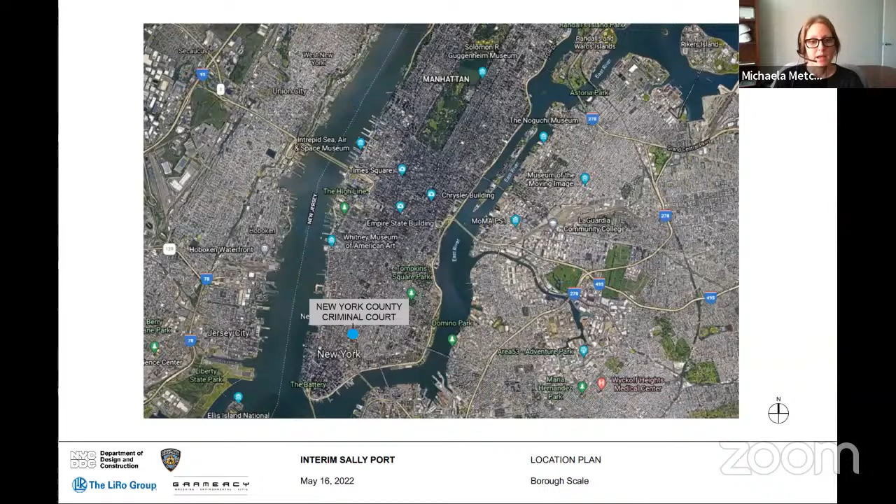The New York County Criminal Courthouse is located in Lower Manhattan. The courthouse is within the Civic Center area and is located on Centre Street between Hogan Place and White Street. This is a view looking north from the corner of Centre Street and Hogan Place. The courthouse is immediately south of the Manhattan Detention Complex to be dismantled.

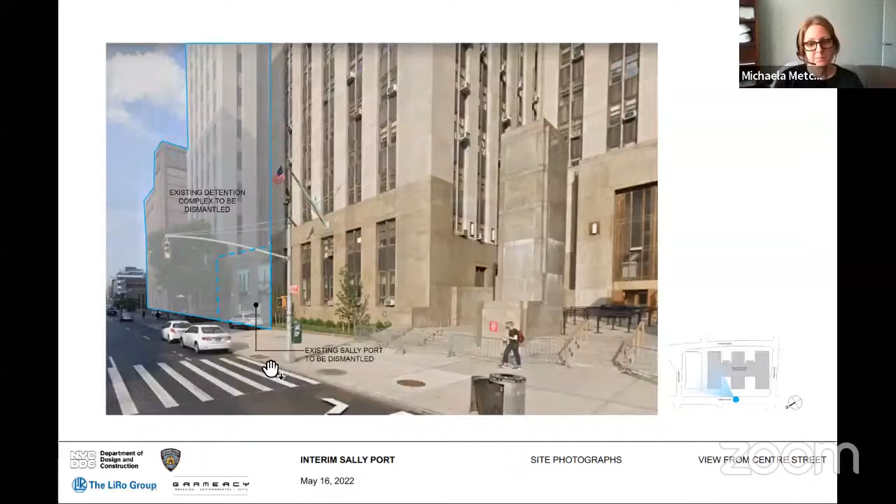This is a view of the existing Sally Port sidewalk and curb cut, which have been used by DOC since 1940. A Sally Port is a secured, controlled entryway into a secure facility. The Sally Port allows DOC and NYPD to safely transport people in custody to and from their court dates and must be operated 24 hours a day, 7 days a week.

This site diagram shows the location of the existing sally port between the detention facility and the courthouse and its relationship to the two buildings. The existing sally port is located directly on top of the cellar and subcellar levels of the detention facility. These cellar levels extend more than 15 feet below grade and will be dismantled along with the upper levels of the detention facility.

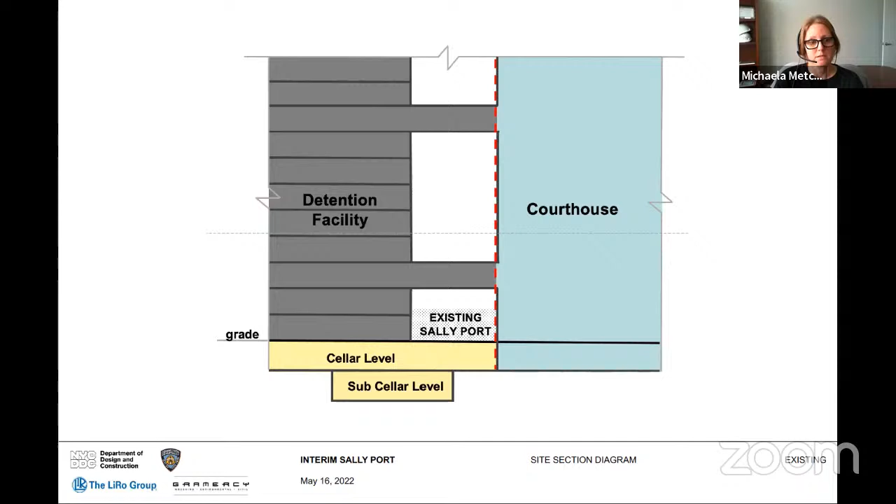DDC has determined that keeping the existing sally port operational during the dismantle work is a safety issue that is not negotiable. The existing sally port is within the dismantle zone of influence for the MDC South Tower and directly below the bridges connecting the MDC South Tower to the courthouse at the 3rd and 13th floors, both of which are being dismantled.

There will be scaffolding on the south facade of the MDC South Tower around and under the two bridges immediately above the existing sally port. You can see this is the area of the existing sally port in here.

Further, the area will be utilized to move materials off-site. Dismantle operations of this scale with high-rise towers plus two bridges on a tight site is extremely challenging and requires scaffolding and barriers to protect all who work on and around the site, as well as protect the adjacent structures.

Moving the sally port away from the dismantle work area, as recommended by the dismantle engineer, is the safest approach, while ensuring that critical DOC and NYPD operations can continue uninterrupted and persons in custody can make their court appearance without undue delay. The placement of the interim sally port on Centre Street allows people in custody and staff to safely move into the courthouse in the most direct route.

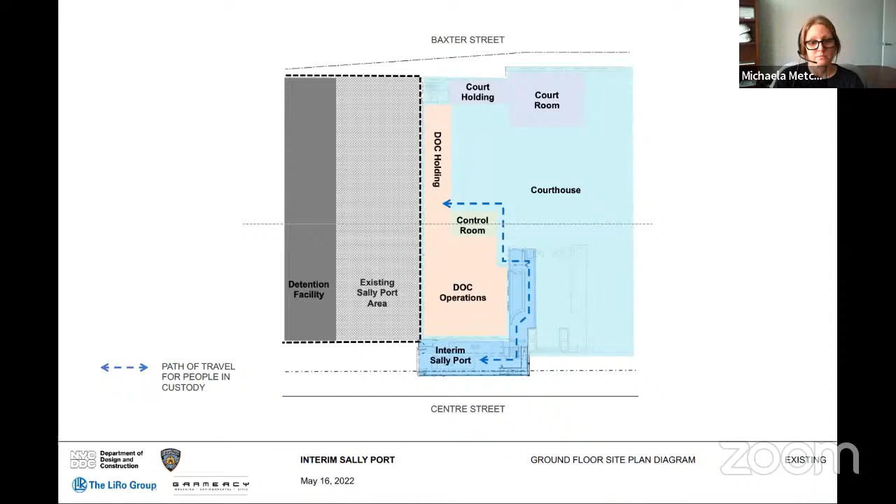Next, I will address the artwork on the west facade of the interim sally port and how this application will be coordinated with the structure's windows.

The windows will include gray tinted glazing, and the artwork will be printed on aluminum decals that will be applied to the metal panels.

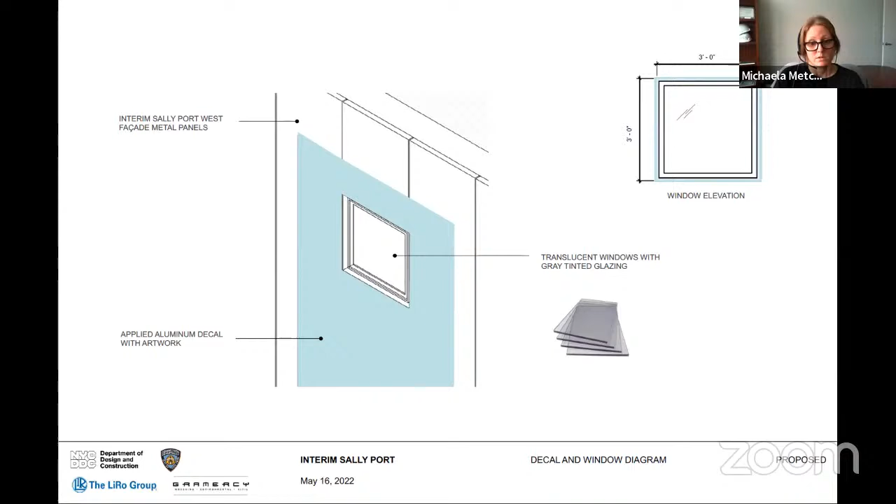Once the decals have been fully adhered to the metal panel substrate, the installer will carefully and neatly cut out the window openings so that they are aligned with the window, so that the openings of the artwork are aligned with the window beyond.

The translucent windows and aluminum decal for artwork have been added to the materials for the project.

Next, Lauren Messier, a member of our BBJ communications team from our project management consultant, AECOM Hill Joint Venture, will provide an overview of community engagement for the project.

Morning, everyone. I'm Lauren Messier, Outreach Manager for the New York City Borough-based Jails Program. I'm going to provide an overview of community engagement activities for the Manhattan project.

These presentations have covered various aspects of the project, including the design and placement of the interim sally port, the removal of existing artworks from the MDC site, and upcoming site work, mitigation measures, and any potential impacts on the community.

In the time since the interim sally port proposal was presented to the Commission at last month's meeting, we have returned to Manhattan Community Board 1's Land Use Committee for a third time to present the updated sally port design per PDC's request. We also requested any design feedback in writing via email.

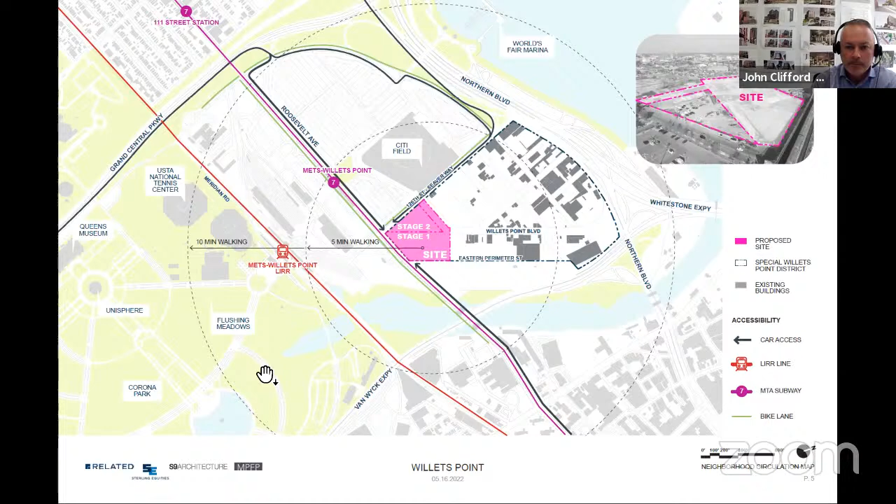So the site is located in the Willets Point Special District in the north part of Queens along the Flushing River. We are stage 1A in the bottom left-hand corner of the Willets Point Special District, so it's fully accessible to both the Number 7 train and the Long Island Railroad stop there. The site right now has gone through remediation from its former use, which was a bunch of scrap yards and car repair yards.

John, can I just interrupt for 1 second? Sure. Just to highlight in the previous image, if you can go back one - in the past 9-10 months since last summer, our team, acting as the developer but in coordination with our partners at the city, has remediated this whole site. We removed 93,000 tons of contaminated soil from the site in the past 10 months. We're going through the final stages of the last bit of paperwork with the state. This cleanup, the brownfield cleanup program, was done in conjunction with oversight from New York State DEC.

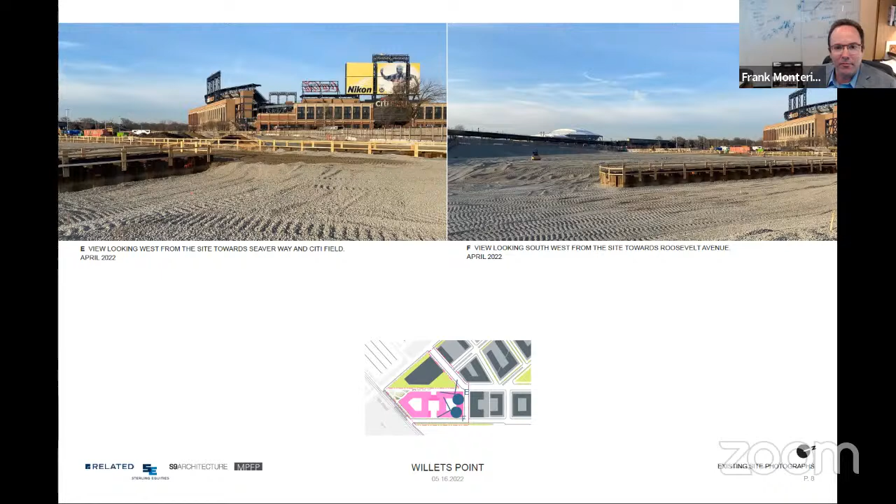Having grown up in and around this site, I can tell you it looks a lot different now than it did a year ago.

The site we found was one of the most unique sites we've ever worked on, certainly in New York City, in that it's a very large piece of land, fully accessible by highways and public transportation, but never really developed. It's probably most famous as being the ash heaps in The Great Gatsby, when it was cinder ashes filling in the Flushing River marshes. And then the 2 World's Fairs that Robert Moses mounted kind of surrounded this, but it stayed undeveloped.

Around 1940, it started its evolution as what was known as the Iron Triangle, which were car repair shops, chop shops, and scrap yards. There was a ULURP master plan for the entire Willets Point district taken on by the City of New York, by the Department of City Planning, and the start of private development, the cleanup, began around 2018, and now we're at the start of the phase 1 development.

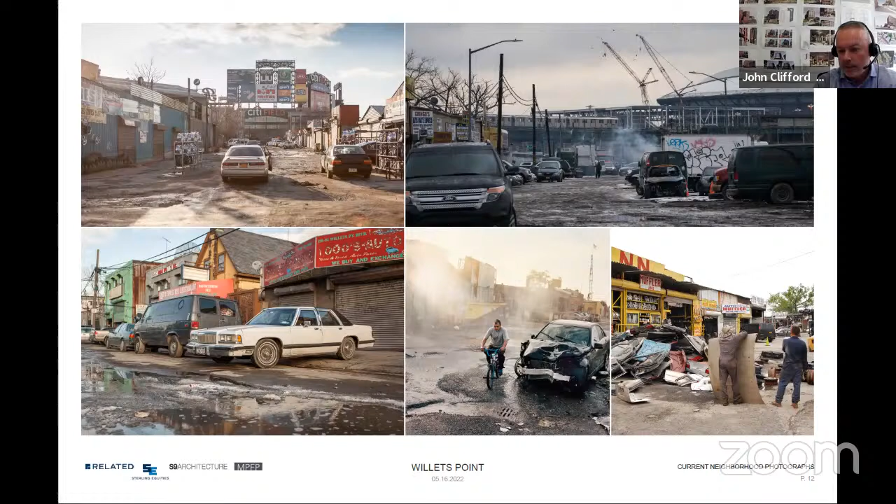The site is entirely in the flood zone. The entire Willets Point district is going to be raised up above the flood zone, so this will be a fully resilient neighborhood.

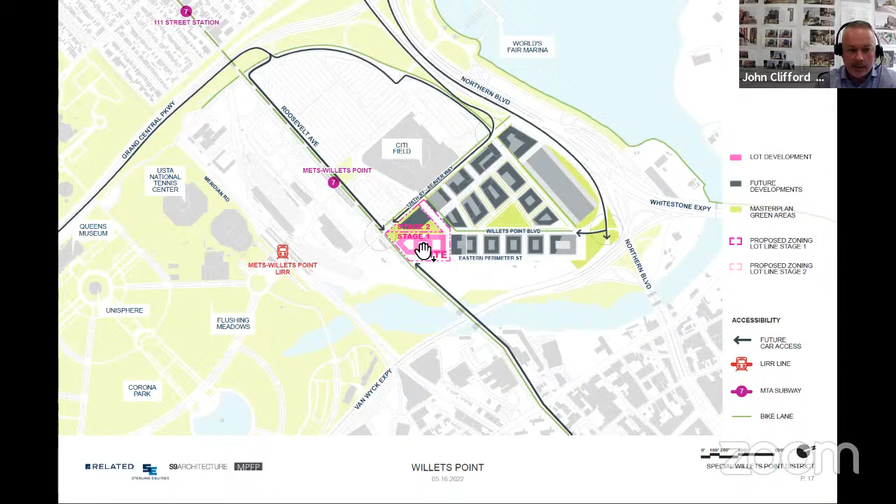Now we're in the special district. This is the corner, so you can see our site at the bottom left-hand corner there, the 3 buildings highlighted in pink, and their massing. So it's 3 buildings - it looks like 2 here, but we'll go through where the 0 lot line is.

12 stories tall with 1,100 affordable residential units. And then also in that pink area is the public realm that will be constructed as part of this first phase. You've already reviewed that conceptual design with Rick Parisi about 6 months ago.

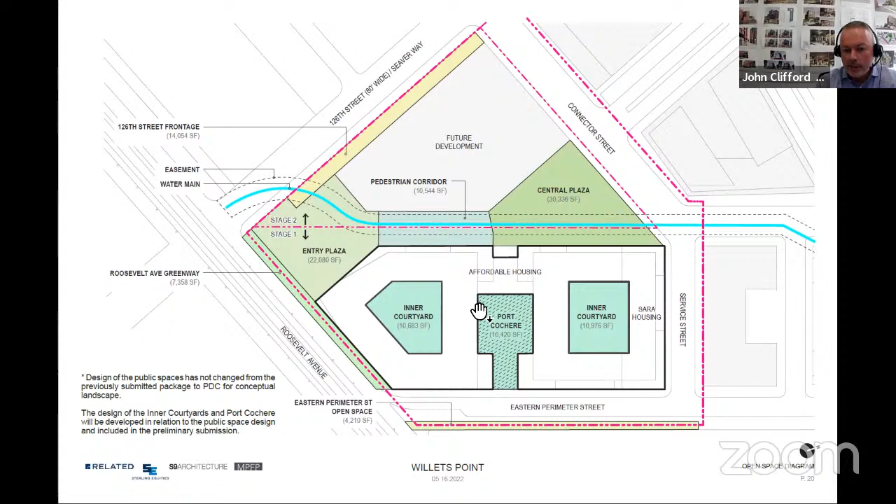So now for the design concept for the buildings themselves. One of the things about this is Willets Point has historically been totally underdeveloped and kind of isolated by the highway system around it. It's probably one of the most visible but least developed pieces of real estate in New York City.

In looking at this, the first building will act as the precedent for all the future development within the new neighborhood. So we really wanted to emphasize technology and design that was both sustainable and resilient, really create a new community - not look at this as buildings, but the beginning of a new neighborhood - and reimagine how affordable design can transform and build this neighborhood, especially with the affordable homes for people, in a much more rapid way.

In the concept phase, which is where we are now, we're looking at different types of technology for both sustainable and resilient design. We're looking at green roofs, potentially some community gardens on the roof, solar and photovoltaic uses, geothermal heating and cooling as a potential way to power this neighborhood. So we're in the concept phase for that.

What we really wanted to do is think about this as creating a community. It's isolated by its physical barriers, but still draws on Queens itself, which is probably the richest tapestry of neighborhoods in the United States, and how we can create a new neighborhood for Queens that's just as iconic as Corona, Flushing, Forest Hills, Jackson Heights and others.

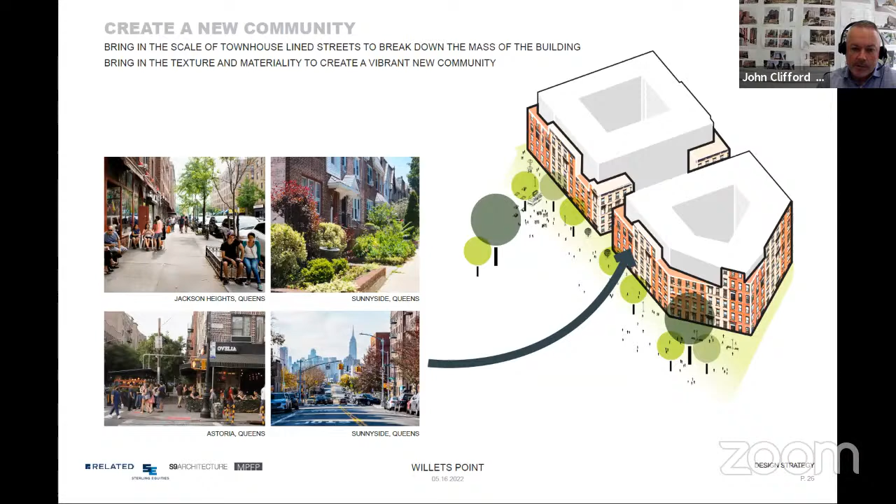Then thinking about how to really celebrate this approach at the public realm, and the number 7 train that creates this movement going east and west past that public plaza and entry park. So having a more organic expression that spills onto that facade and relates to both the public realm, public plaza, as well as the number 7 train's movement going east and west.

We also want to, as part of building this community, celebrate its art and celebrate the diversity of the community. So we're looking at how that can be incorporated into potentially the courtyards or the lobbies or some of the more public areas of the buildings themselves, and potentially going back and looking at how it can go into the public realm of the plaza and the pedestrian way on Willets Point Boulevard.

So what we came up with was a way to effectively create a kind of dynamic movement along the facade that creates this organic spill I talked about, where there's a gradation in the primarily masonry wall facade, transitioning it more toward a metal wall facade by diminishing the brick widths as we go across the bays here.

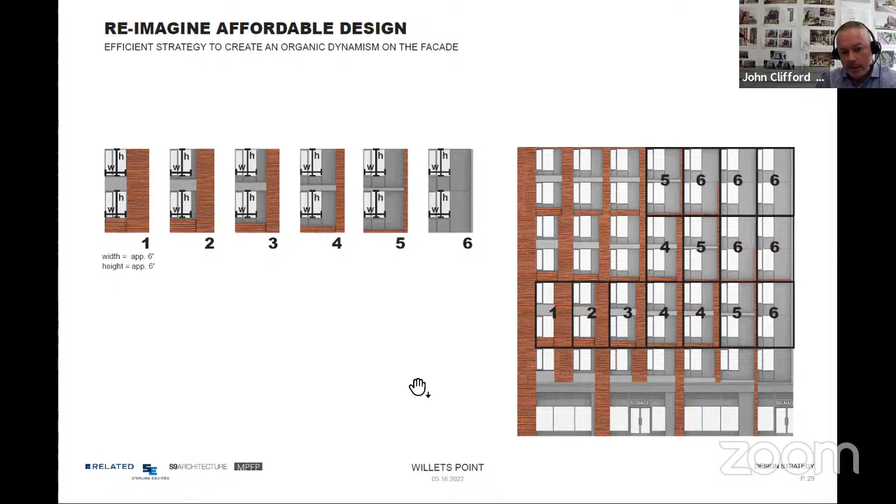So this is more of a technical drawing of how this is accomplished, and then you'll see in the rendering how this affects the facade.

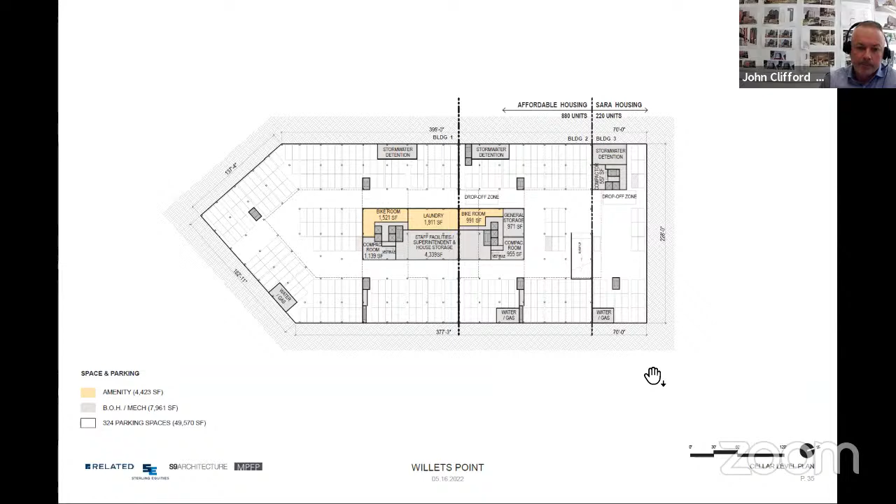On the roof, we're planning an amenity area for the affordable housing residents, and that might have access to some of the community gardens and other things that we talked about earlier that we're investigating.

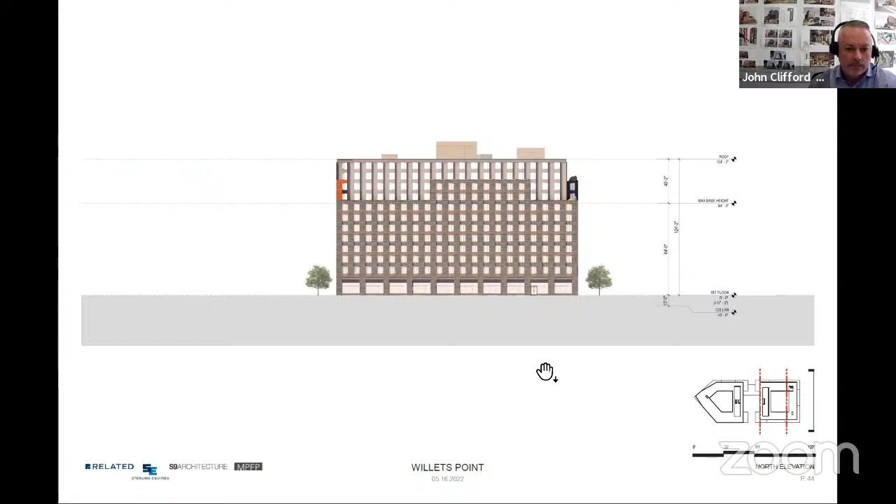In this concept phase, we're looking at the buildings being primarily a variety of different brick masonry types. All of the windows are operable in these residential buildings, and we're using an architectural metal panel system to create the gradated window systems that I showed you earlier.

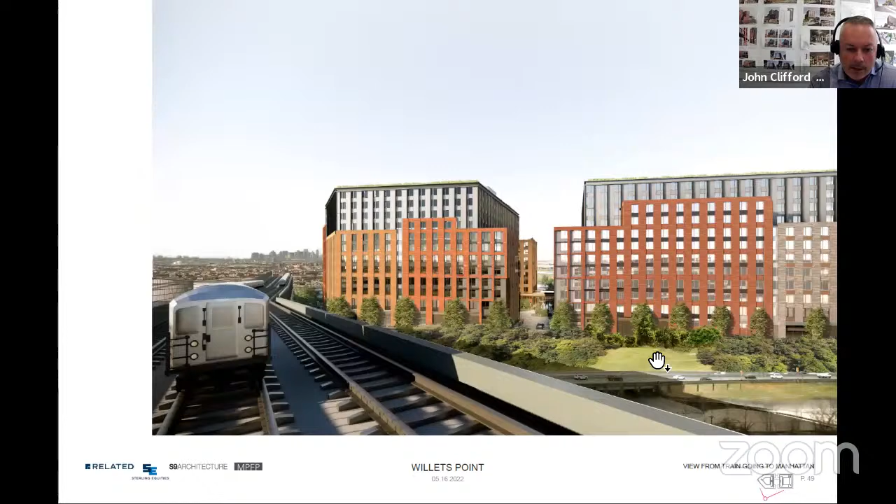This is a view coming from Manhattan toward Flushing, and in the other direction from Flushing toward Manhattan. On the left, you see building 1 and then building 2 on the right with the lobby connecting them. You can see a little hint of the porte cochere off of Perimeter Street there.

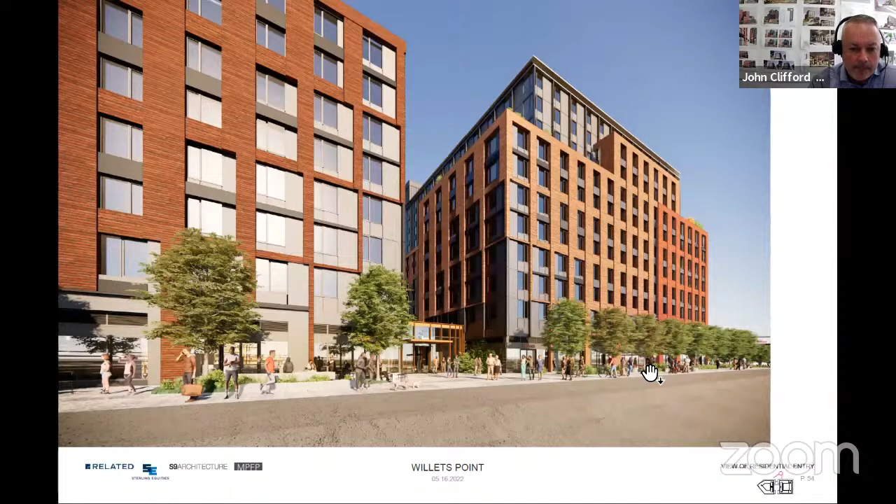The entry point to the two affordable buildings—that's the lobby entry in the middle there. And again, with the temporary fence, because we're standing in phase 1B right now for this view.

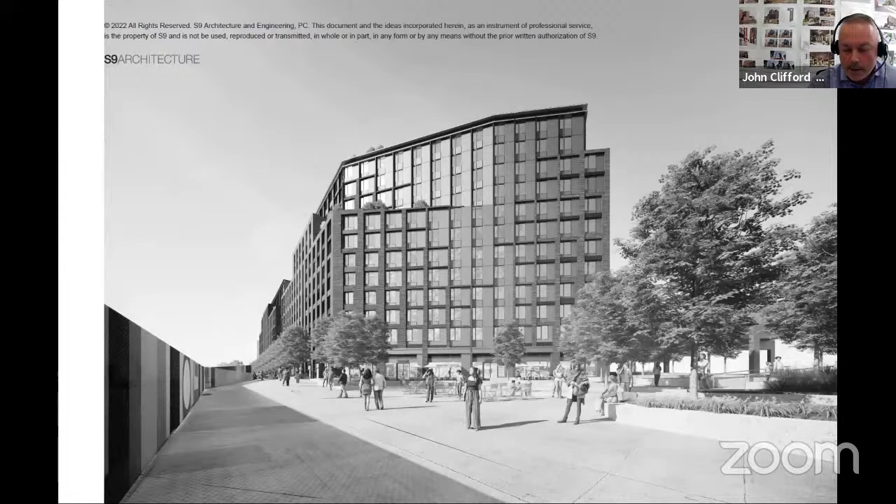Thank you, John. Good to see you, by the way. Good to see you.

Commissioners, any questions or comments? This was a very thorough presentation and certainly complements the one that we saw by MPFP.

I have a question. I'm trying to go back through the presentation to see exactly what the street name is, where the water main goes through, and that the DEP has said that no vehicular access can be granted on that street. But I'm a little concerned about the senior housing and any emergency vehicles. I live in a neighborhood with a lot of nursing homes and senior housing, and that's a really big issue—access for emergency vehicles.

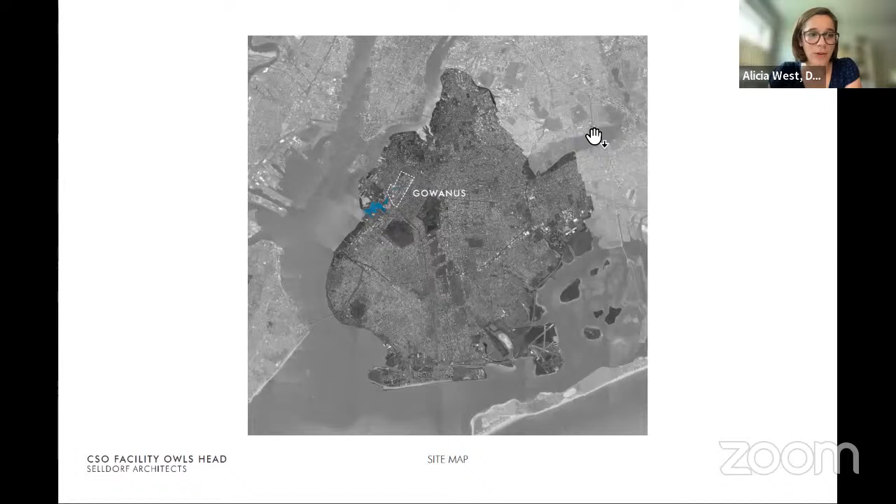We're very excited to present the conceptual designs for the new DSNY salt shed and interim compost facility, which is the first phase of work as we prepare this site for the construction of the second Gowanus Canal combined sewer overflow facility. Kevin, can you go to the next slide? Many of you may remember Selldorf's design for the CSO facility at Head House at the head end of the canal, which is shown here, a little picture window.

You graciously awarded this project, thank you. We're really excited to have the same team working with us on the design of the architecture for what we call the Owl's Head site, which is located at the bend of the canal and is shown in that orange triangular shape there. Thank you, Kevin.

So designs are in the works for the Owl's Head CSO facility's head house, as well as about 1.8 acres of waterfront open space. We'll be back to share those in the coming months, but this is the first phase of work that has to happen with the salt shed. So that's where we are in our schedule to share that with you.

We do appreciate that the construction sequencing is complex, and we're happy to answer any questions you may have to the best of our ability at this point. I'm going to pass it along to Kevin to walk you through the site context and the proposed design for the salt shed and the interim compost facility. And of course, I'll stick around for any questions you may have.

Great. Thank you, Alicia. My name is Kevin Keating. I'm a partner at Selldorf Architects, and truly appreciate the opportunity to present the conceptual design for the salt shed. But first, let me start you off by showing you where the site is. As Alicia mentioned, we're on the Gowanus Canal.

This is the second phase of a two-phase project. We are located at the Owl's Head site, which is at the midpoint of the canal where the canal bends and starts to make its way north again.

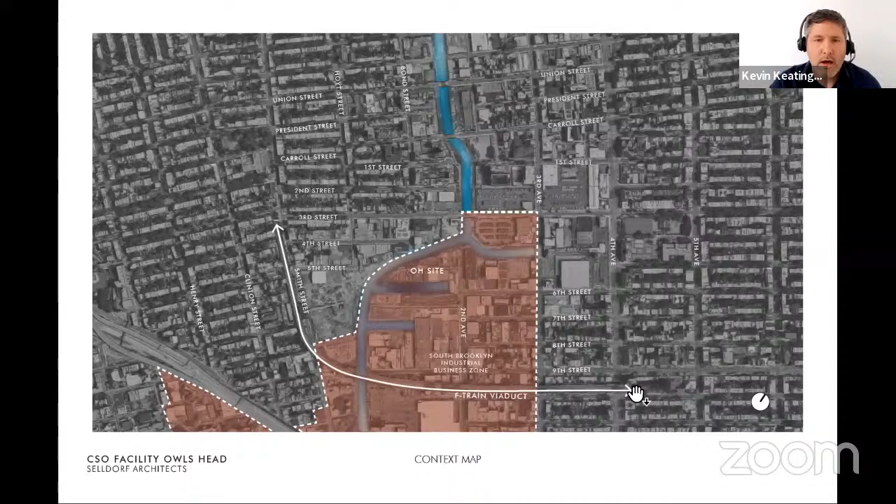This is a view from the F train as you're making your way into the city, into Carroll Street Station. The area outlined here is the Owl's Head site. It's approximately 5 acres and has approximately 1,700 linear feet of waterfront. The area highlighted here is the proposed location for the new salt shed.

This again is a view from the Smith and 9th Street station looking at the site, due north. You can see the large site, 5 acres, and the proposed location for the salt shed, as we'll get into.

I'll quickly walk you through a few images of the existing conditions of the site. But first, let me start with what's on site. There's quite a variety of things. First, there's an existing DEP pump station, a below grade structure, which will be incorporated into the new proposal. There is the DSNY salt lot.

This is a great aerial view because you can actually see this in construction as it was many years ago. But there's the existing salt lot. The area here where my cursor is, is where their plow racks are. This is the salt shed itself.

Adjacent to that is Big Reuse composting facility. They have their aeration bays and composting bays, as you can see here where my cursor is. In partnership with Big Reuse, there is the Gowanus Canal Conservancy. They do many community engagement programs, and they work hand in hand with Big Reuse.

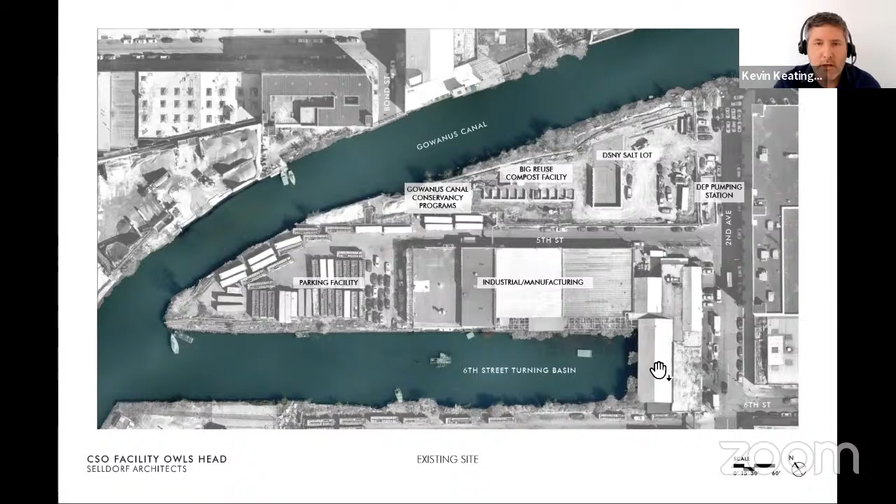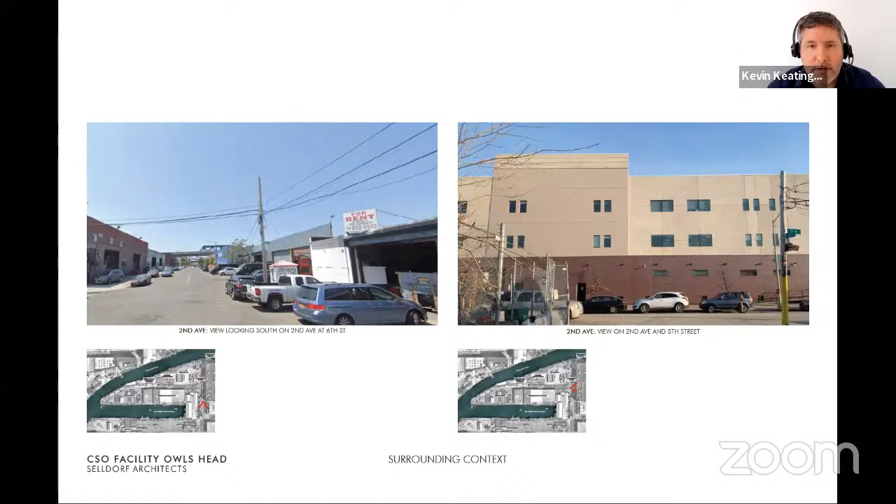This is now a view along 2nd Avenue, looking south towards the F train viaduct. This page is a view of a DOC facility, a probation office, which is directly across the street from the proposed location of the CSO facility.

These again are two more images of the surrounding context. You can see these low-lying warehouse type structures. The image here to the right is actually a view of the current condition of 5th Street. This road will be demapped as part of this overall project.

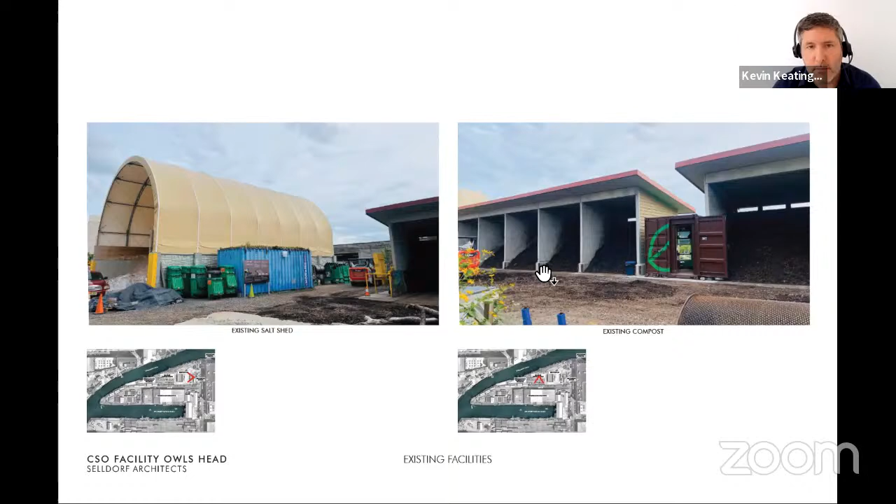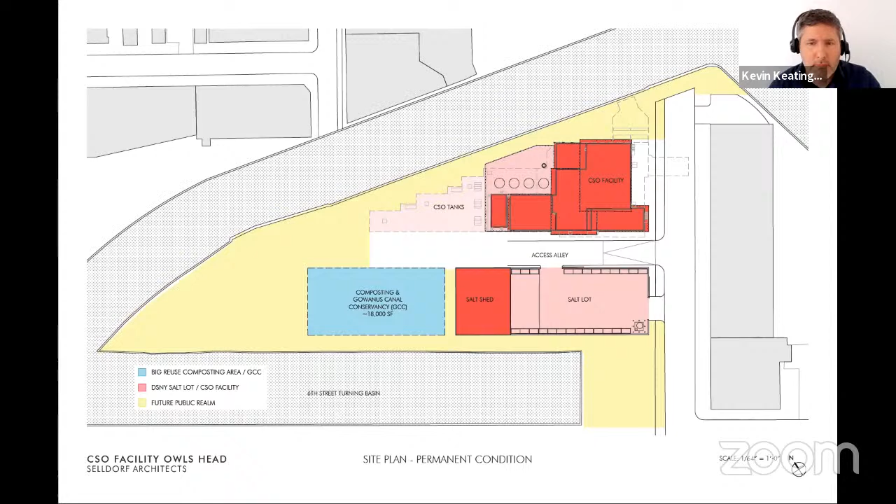So let me start by saying that in order to properly design these facilities, we and the team have had many conversations with DSNY to understand the requirements and functions needed to develop this project. Simply put, here are the main drivers.

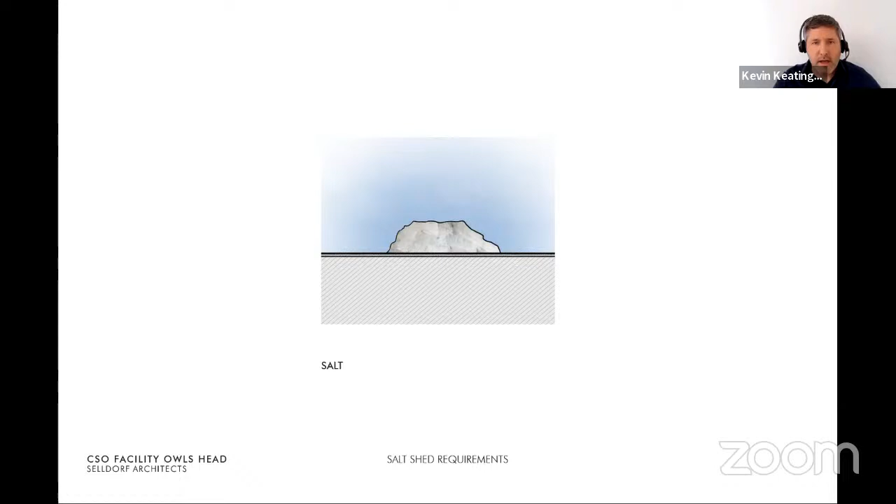Let us first start with the salt. The salt is obviously used during the winter months to remove snow and ice after a winter rainstorm or a snowstorm. Secondly, in order to maneuver that salt around the site, we need push walls that could actually be pushed against by the front end loader and positioned into place. We also need an enclosure over that salt in order to protect it from the elements, and in addition to that, we need to provide ventilation within the shed itself, as you can see by this reveal between the two elements.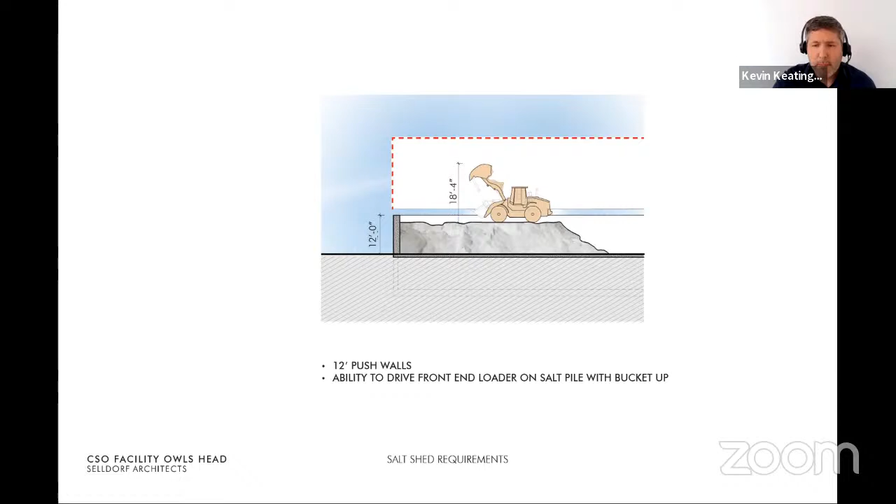Thirdly, we need to provide the height to accommodate a front end loader on top of the salt pile and basically allow us to have an interior dimension of 31 feet, which will provide an external dimension of 36 feet for the shed itself. There will be 12-foot push walls at this location. That 12 feet is dictated from the interior portion of the site itself, with the 22-foot opening at the eastern end of the shed.

So let us now dive into the context in which the project is in. The character of the site is in the IBZ zone. This is distinctly industrial, and the surrounding Gowanus neighborhood is marked by a consistent and monochromatic material palette of low-rise warehouse-type buildings.

It's distinctly industrial. The community has told us that they would like to uphold this. The community has mentioned that they want the facilities to be true, honest, and representative of the Gowanus environment. These here are a series of photos that speak to us and that are reflective of the prevailing character around the site. We agree with the community and believe that the architecture for these structures should be reflective of the surrounding aesthetic. Our effort is to make these buildings have a combination of grit and grace that is emblematic of this area.

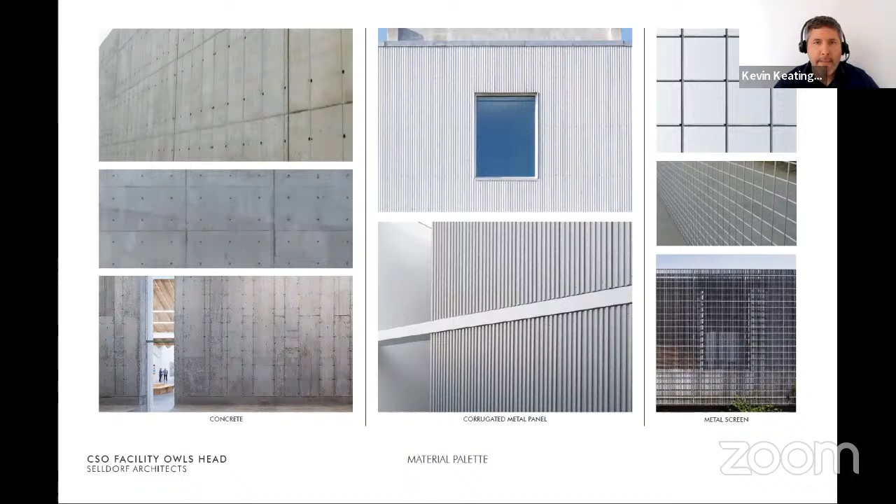These materials will be applied in three simple yet functional forms. First, the concrete will be used to create the push walls that wrap the perimeter. On the right-hand page, the push wall will start at a low elevation of 2 feet at 2nd Avenue, and gradually make its way up as it approaches the salt shed.

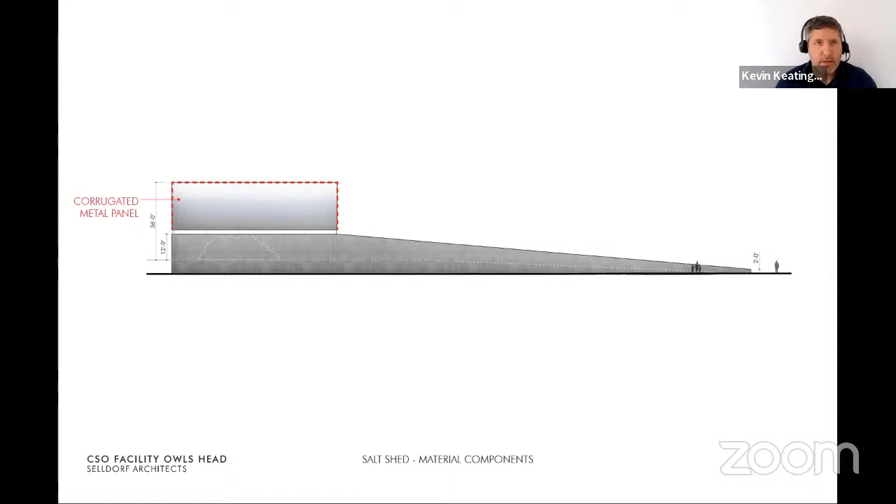Secondly, the corrugated metal panel is employed as a refined surface treatment on the shed, helping protect the salt from the elements. Third, the screen made of metal mesh creates the visual transparency and protected enclosure needed along the perimeter at 2nd Avenue. We wanted to create a visually transparent enclosure at this end to allow visual access to the happenings of the facility inside.

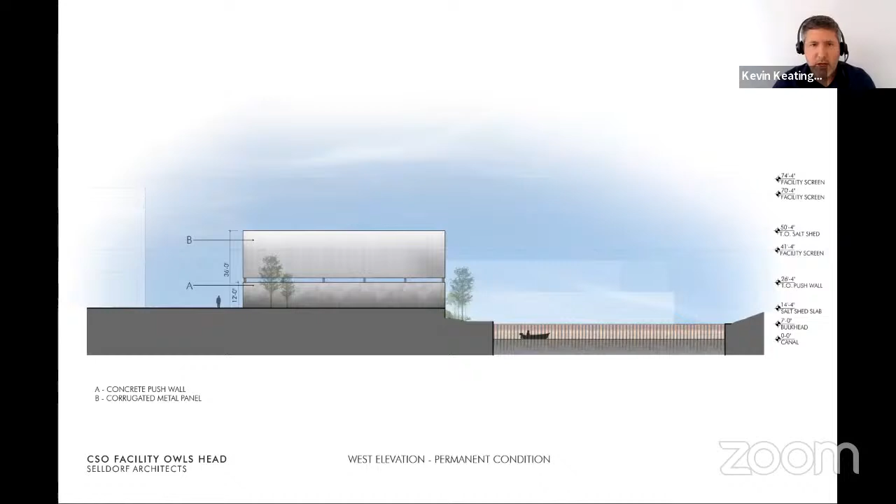I'll quickly stroll through these. This is now a view of the facility from the western side. There too is the composting there to the right, page right.

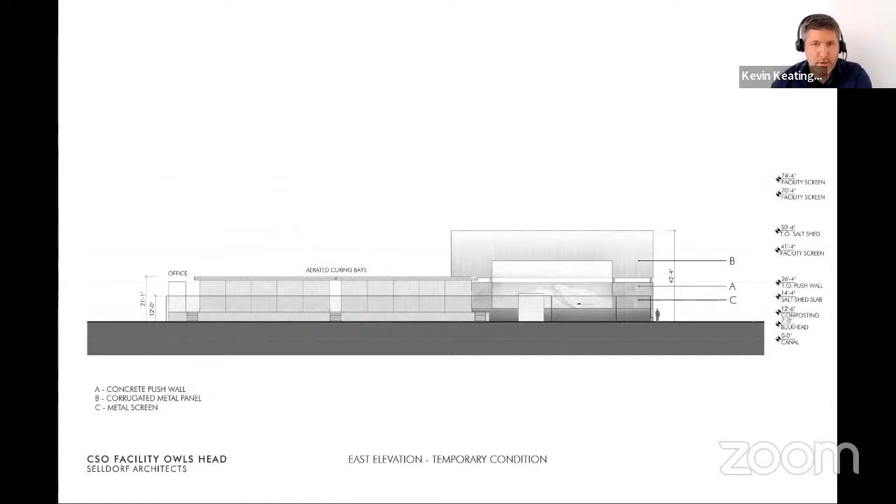This is the composting here to page left. Again, public access will be provided during construction. This is now a view of the facility as you are walking along the access alley. You can see the simple and material forms as they meet each other.

Let me close by saying we believe, along with the community, that industrial architecture should be true to its function, yet these functions and forms can be designed and developed in a way that provides a neighboring backdrop that is subtle, intriguing, and beautiful. Again, I thank you for your time, and my team and I look forward to continuing to work with and hear from you. Thank you.

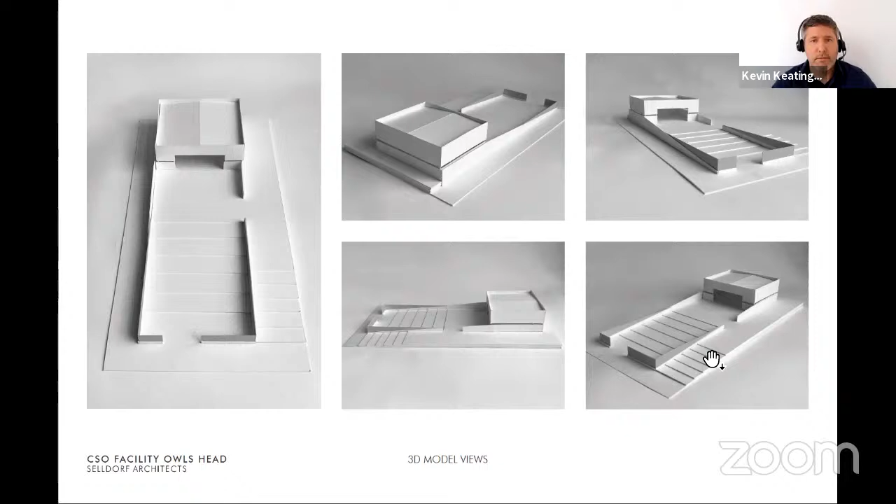Thank you very much. Commissioners, any questions, comments, concerns?

I would just say thank you for that very informative presentation and very elegant industrial building. It's great to see that care being taken with projects like this. So much appreciated. Thank you so much.

I have a question. I see that you responded to an earlier question from some commissioners during a pre-review regarding potential maintenance partners, and it's good to see that you've got a number who might be prepared to step up. But I know that at least one of them, the Parks Department, has some pretty clear guidelines for what they consider to be palettes of materials, both hardscape and softscape. Do you think that by the next time you present this, you will have an understanding of who those maintenance partners might be for the site?

We've been working with our friends at the Parks Department, and we've also been having community meetings. We've had two so far, as part of a broader public engagement program we're doing throughout the year, in addition to our typical community board engagement. So all of that is still evolving, and we're aware of the Parks Department's standards—they've been very clear about their expectations. We're hopeful that with plans for a waterfront open space business improvement district in Gowanus, proceeding as part of the rezoning, we'll have a bench of folks to help out and maybe allow us to do some things Parks may be less comfortable with in their typical palette. All of that is ongoing, but people are very excited to see what we can do here and how it'll turn out.

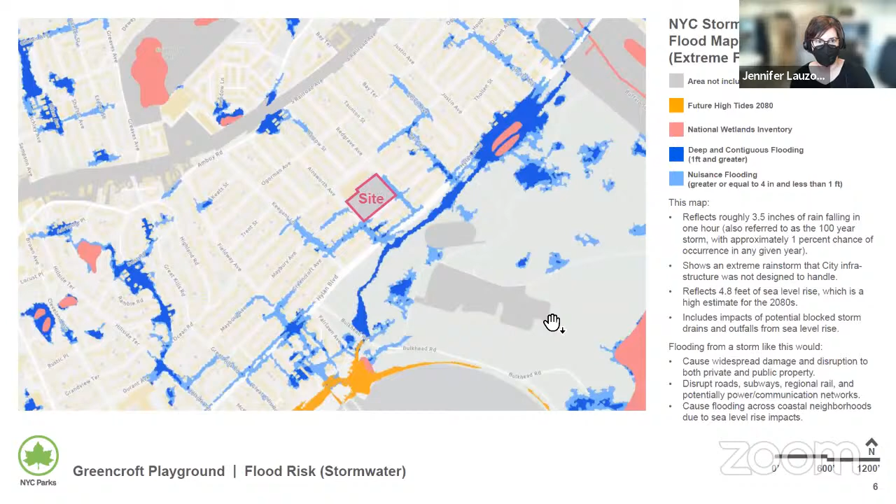This park is located in the Bay Terrace neighborhood of Staten Island, and it is adjacent to the PS 53 school. The park is not in the flood zone. There is some flooding in adjacent streets during major storm events. Primarily the surrounding neighborhood is low density residential.

As far as parks within the 10-minute walk, we have Siedenburg Park, which is mostly natural areas and hiking trails, and then the Great Kills Park, which is currently closed due to contamination.

This site has a few different elevation changes, which I'll show with more clarity later. The upper terrace currently has 2 to 5 play. There is one accessible entrance into the park, on Redgrave Avenue. There are stairs from this upper terrace down to the main level with the comfort station that is currently in construction. We have 5 to 12 play located on the same level as the comfort station. There are stairs coming into the site from Croft Avenue.

Then there are basketball courts that were recently renovated, and on a lower level, there is currently a baseball field and a natural area. The baseball field is open and sunny. We have some flooding in the outfield area as well as the natural area. The play areas are currently asphalt that's in poor condition with older play equipment.

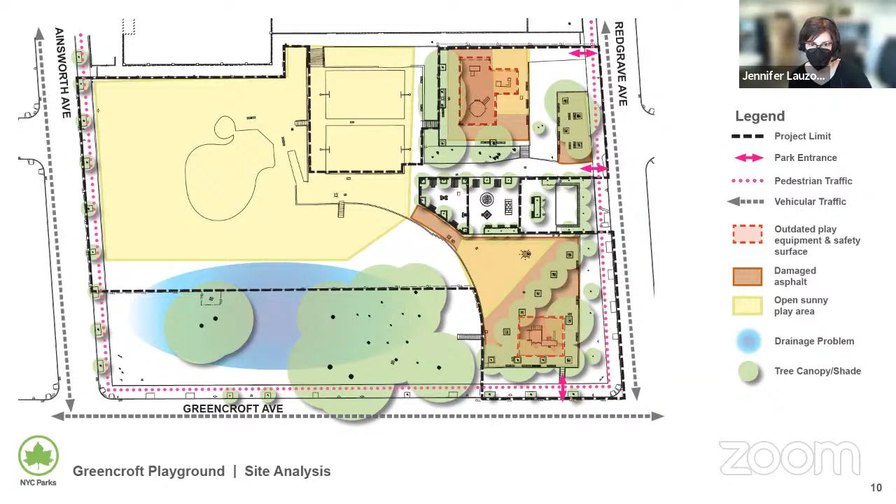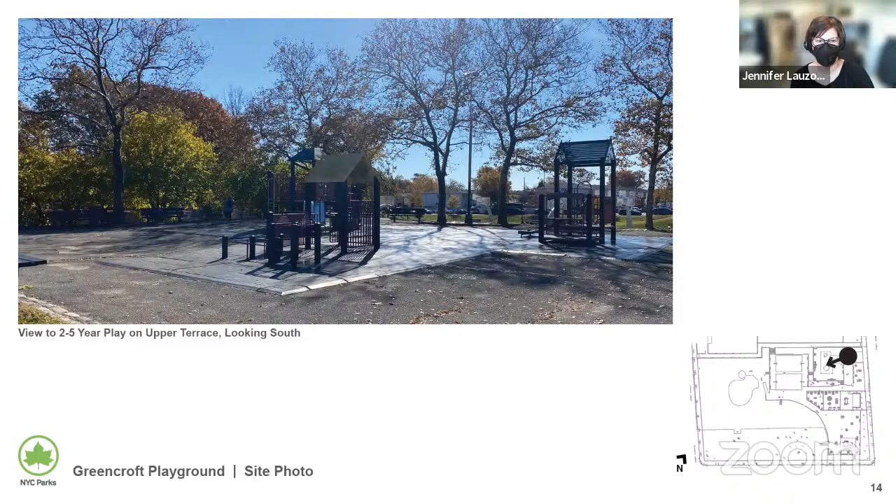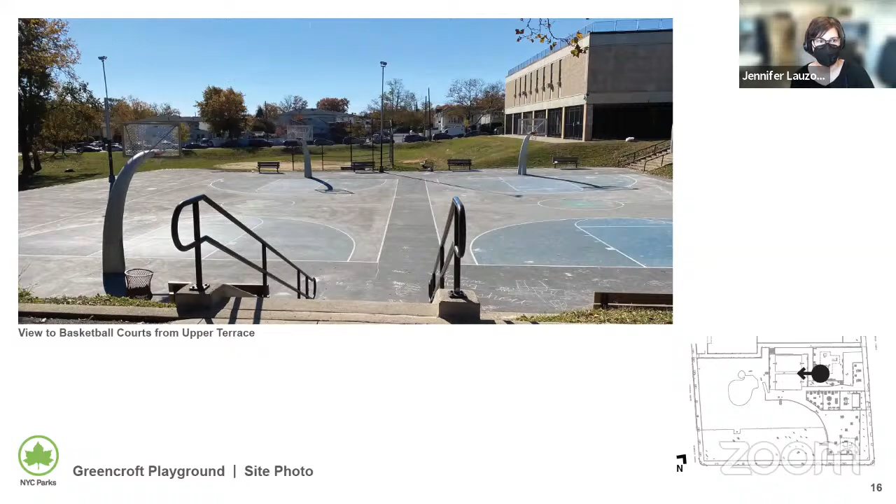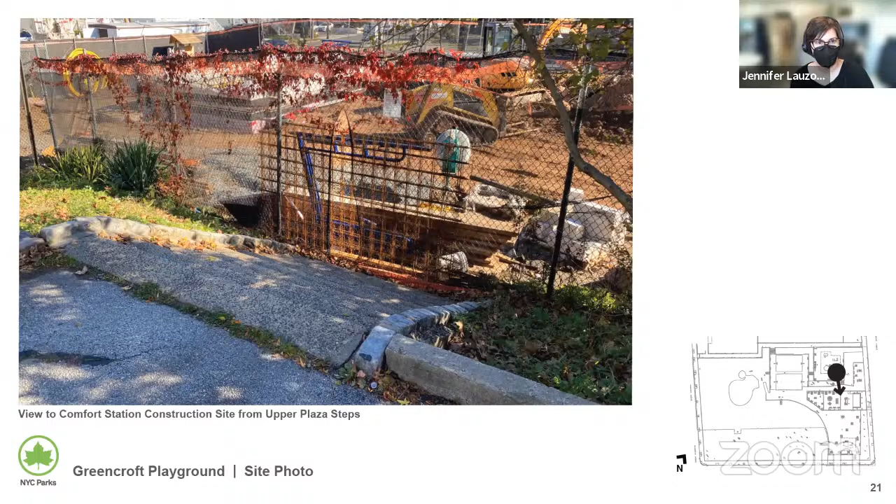We had some very successful scope meetings with both the community and the school. The school meeting was especially great because we were able to meet with 2 classrooms. We gave them worksheets to fill out prior to the meeting. The kids were excited and prepared with drawings and a list of things that they wanted to see in the park. It was a virtual meeting, and the children presented their ideas, and then at the end we were able to get those worksheets back, so even the kids who didn't feel up to presenting were able to give their ideas.

So after getting the thoughts and input from the community, our plan improves circulation throughout the site, makes the site ADA accessible, expands the play with a new swing area, a spray area, new play structures, and renovation of the field for informal play. And we've also improved the drainage of the field.

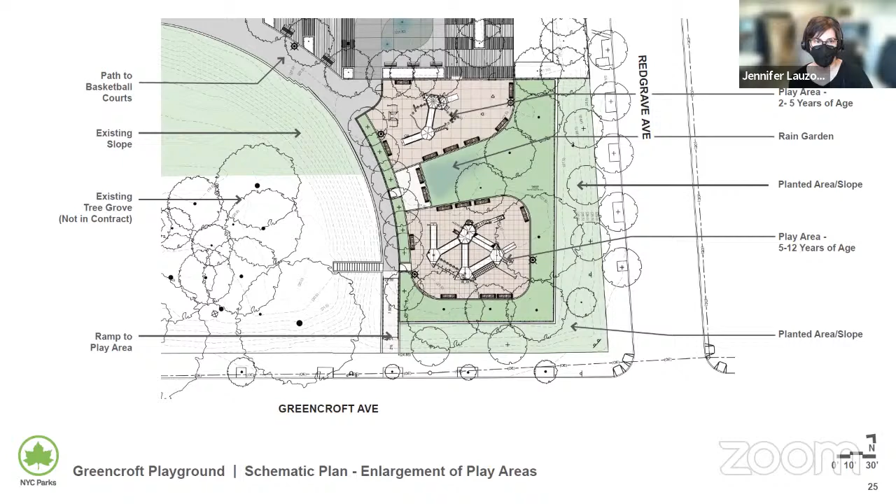Our fencing, we're keeping minimal fencing just where needed and having handrails at the stairs and the ramps. We will be lighting the site with a pedestrian scale light post, mostly just the circulation and the active play areas.

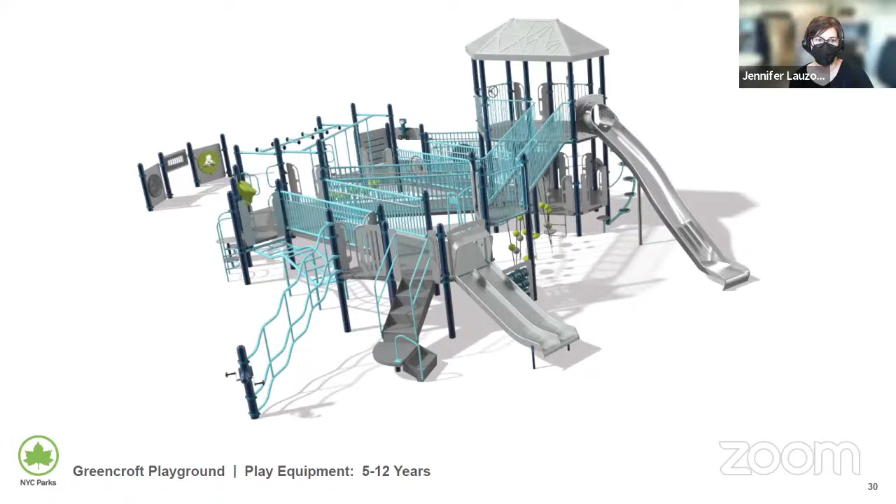The play equipment will have lots of accessibility with ramps to the different levels within the play structures, as well as lots of climbing features that the community requested. So this is a 5 to 12 play structure and the 2 to 5 play structure, which also has a playhouse for quieter play.

The spray shower area will be all ground sprays to keep the area open, so when the spray isn't being used, it stays open.

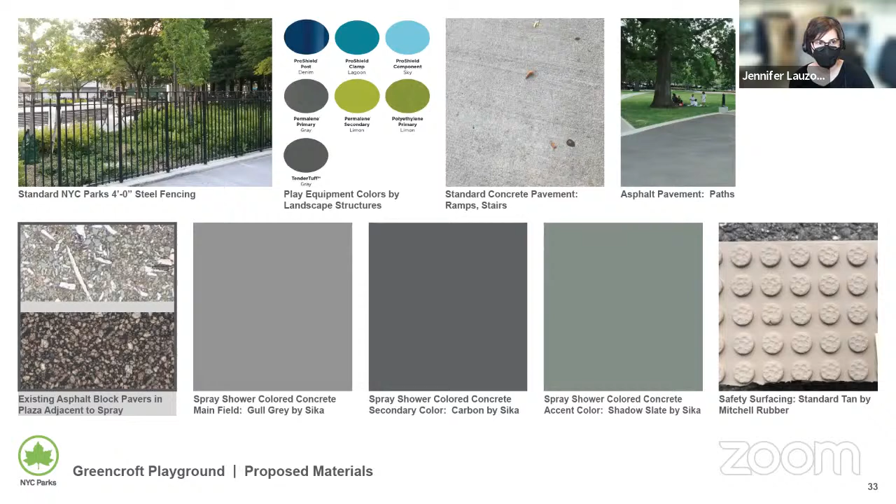So the plant selection was based on plantings that were already selected for the comfort station project, as well as plants that also do well in Staten Island. And we are increasing permeability in the site by decreasing the amount of pavement.

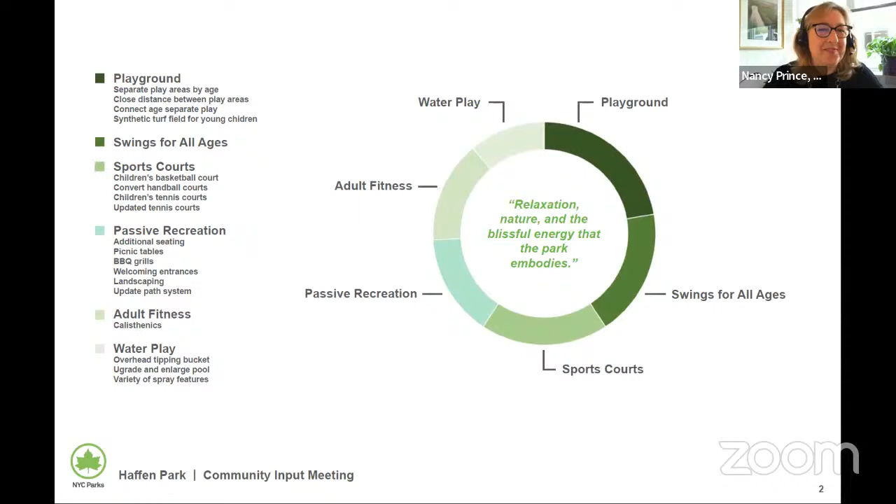So the goals were to create an inclusive and exciting play area for all ages, to correct a lot of drainage issues that you'll see what we were dealing with, and increase the connectivity and circulation. Right now, there's no entrance to the park that's wheelchair accessible, and we'll be making all but one of the many entrances accessible. And we'll be incorporating the adult fitness that was asked for.

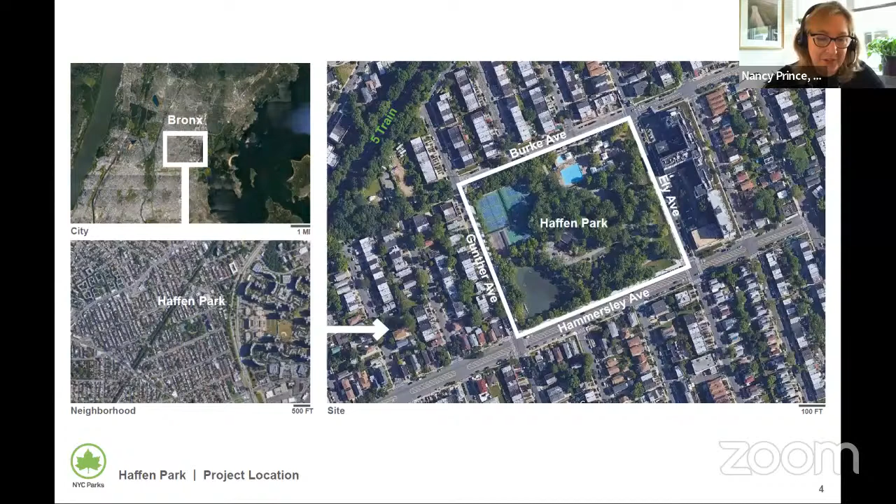The park is in the Bronx in the Baychester neighborhood. A lot of the community refer to this area as the Valley, and that's very fitting. There's not much in the 5-minute walk, and really not much in a 10-minute walk in the way of park, so this really is a very popular community park.

It's bordered on 3 sides by single and 2-family housing, and on the northeast side by a rehabilitation and nursing facility. Some of those residents and patients use the park.

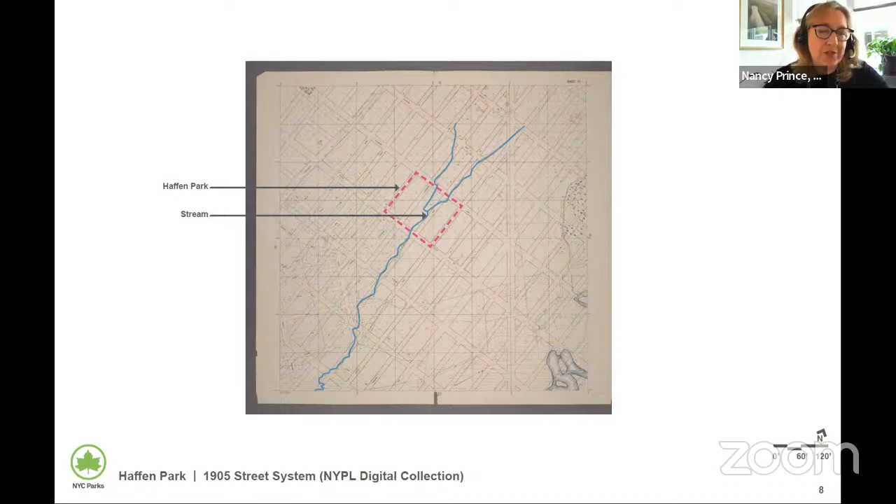You can see it's well out of the flood zone. Before this was a park, there was a stream that ran through it, which explains the very silty, poorly drained soils we have now. That was a challenge for us that we're going to be solving in design.

These are all the items that you can see in the park now. There's tennis courts, very popular basketball, a lot of handball walls that I talked about, a popular multi-use synthetic turf field, a playground or scattered play equipment, and a lot of picnicking in here. Sort of in the bottom, field house and comfort station.

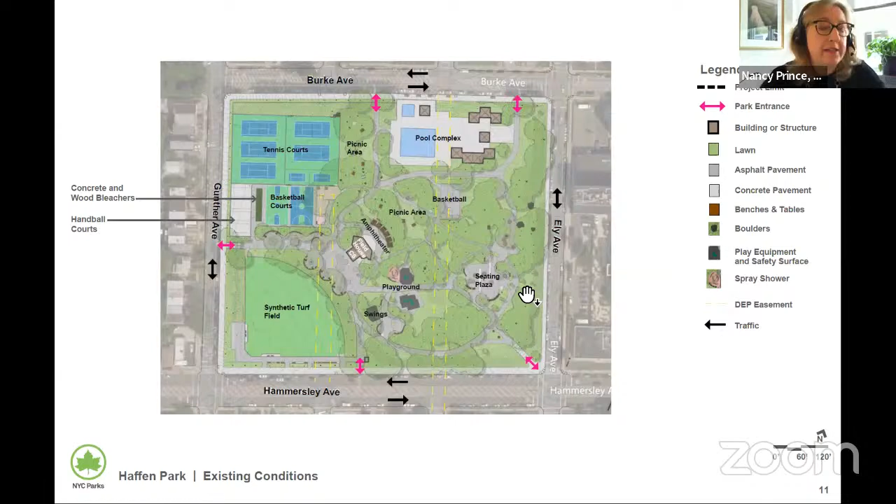And here in this corner, you can see the pool, the intermediate outdoor pool that you'll see later in the presentation.

Here you can see how the pavements are in very poor condition. It's just worn and tired. It's definitely in need of reconstruction.

Here's some more of those paths in poor condition and the very popular tennis courts. In our new scheme, we're able to align the tennis courts for better play. Right now they're aligned east-west, and we're going to be able to align them north-south.

Here's the popular basketball and the multi-use synthetic turf. And here is the area all around the field house and comfort station, which has some low spots on either side. We're going to be addressing this low area by raising up the grade to the same level as the stage, which will make a multi-use area that can be used for presentations and performances, but will also better weather the heavy rains.

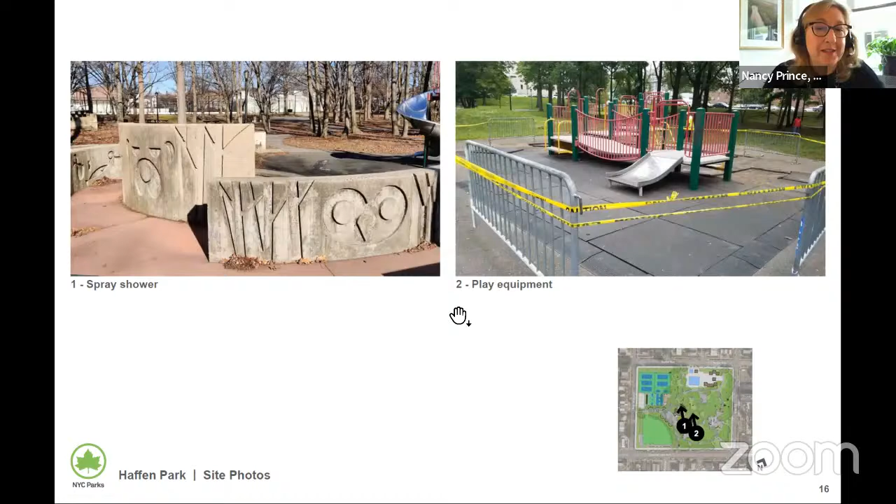Here's some of the old play equipment. You can see this is periodically cordoned off because when it floods, the safety surface floats and our M&O people have to go put it back together.

Here you can see the scattered play equipment, pretty old and not that interesting, and some big swings. It does have a nice open feel with lawns and some beautiful trees.

The circulation in the park is a little chaotic and you can't figure out where you're going. It's not very intuitive, with a lot of extraneous pavement. This is a good shot of that. And here's showing some of the flooding problems.

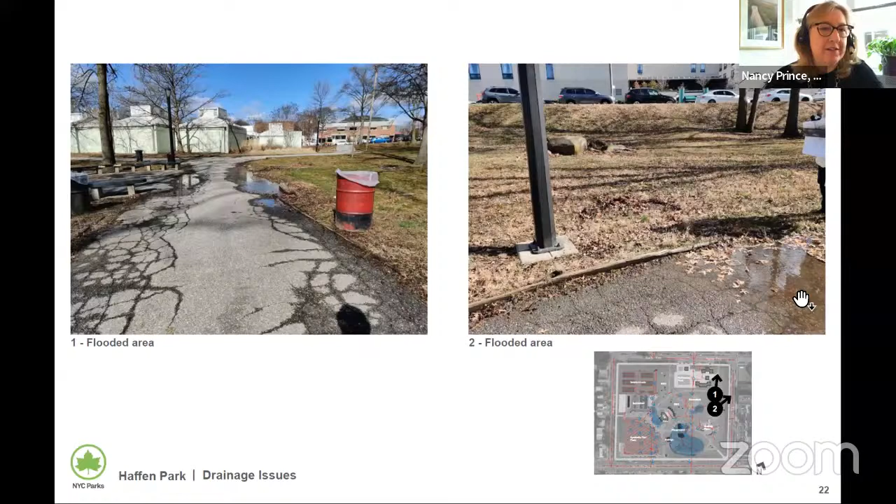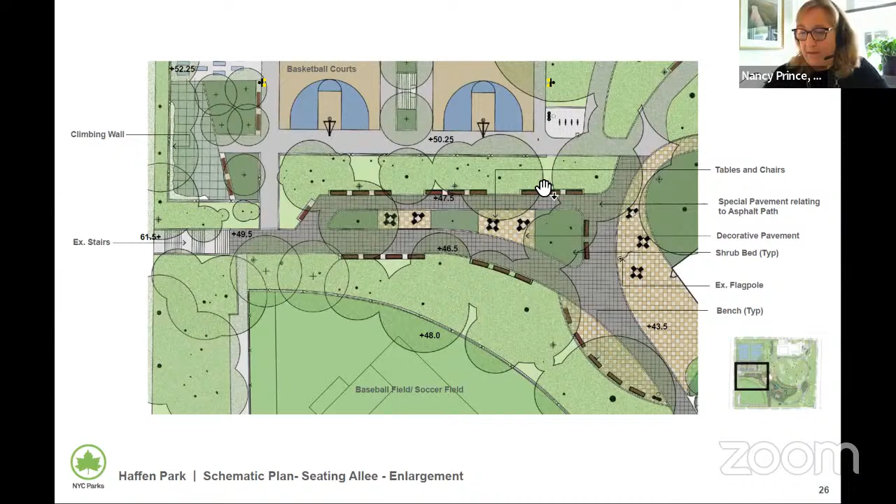So next, here's a blow up of one of the sitting areas near the basketball and between the basketball and the baseball field, and next to the comfort station and central area.

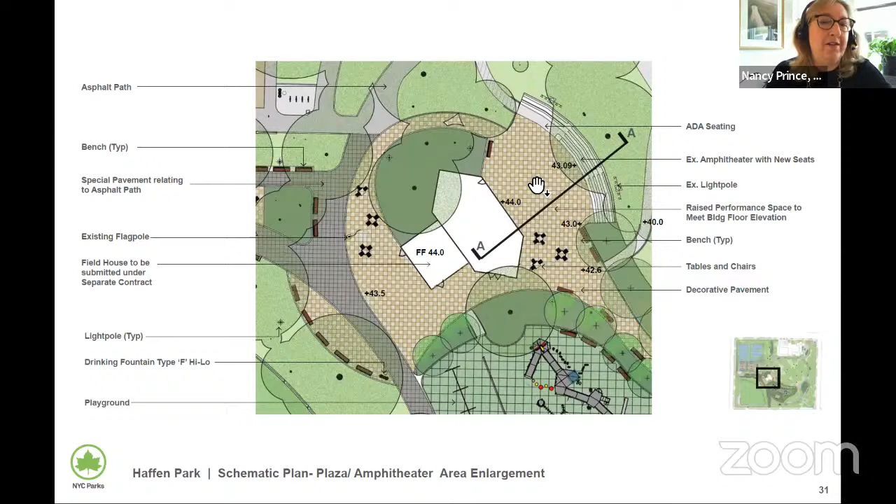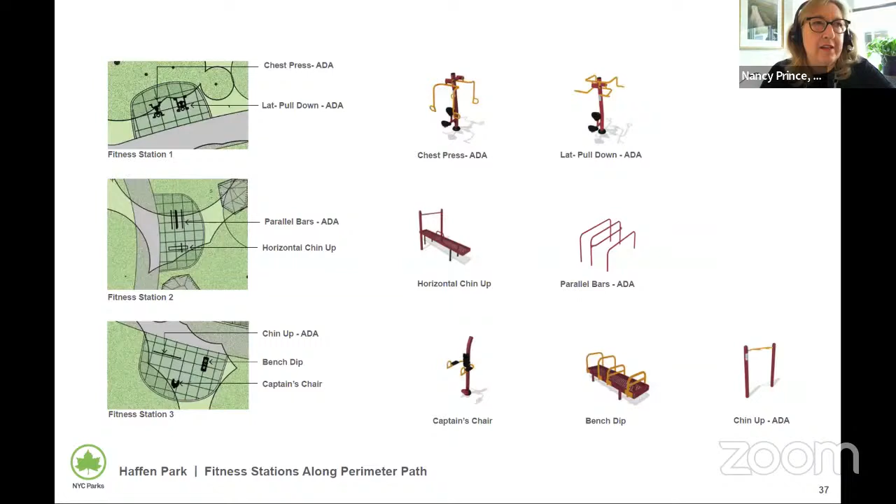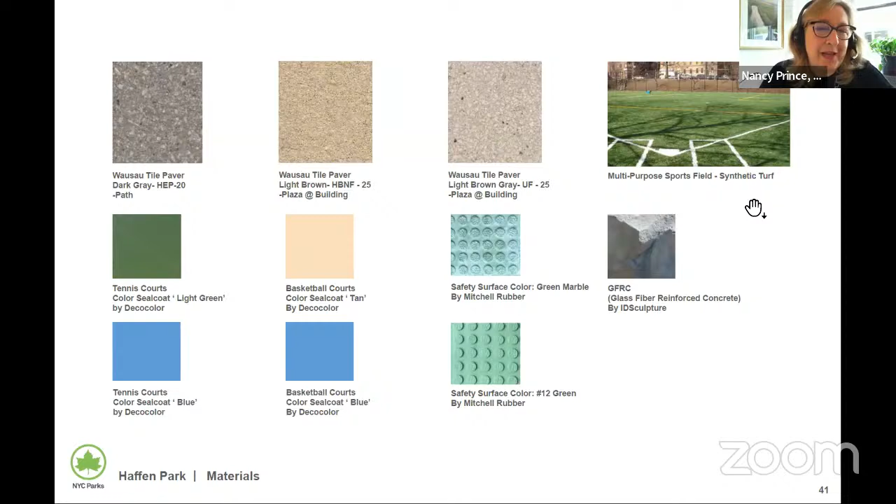Okay, now I'll turn it over to landscape architect Max Goodstein and architect Stanley Chu from our office, and they'll go through the intermediate pool.

53 years ago, in the summer of 1969, Mayor Lindsay held the grand opening for Haffen Park Pool, and it was grand. He actually flew by helicopter from Lower Manhattan to open this pool. Today, we will be presenting its first reconstruction.

This is a reconstruction project we're particularly excited about because it will serve as a pilot. At Parks, we're always looking for ways to maximize the value of our assets and introduce efficiencies into our facilities. In addition to the pool itself, our pool facilities have these bathhouse buildings. Haffen is one of about a dozen intermediate pool sites designed similarly, with an intermediate pool, a top pool, and these cube-shaped buildings you see here.

These buildings, however, are used just 10 weeks of the year for the pool season and sit dormant for the rest. Here at Haffen, for the first time, we are transforming these buildings into year-round spaces, serving not only the pool during the 10-week season, but also our maintenance and operations division with a new district hub for all 12 months. This will provide needed offices, storage, and logistics to assist in maintaining our Bronx parks, radiating out from Haffen Park Pool and having a borough-wide effect.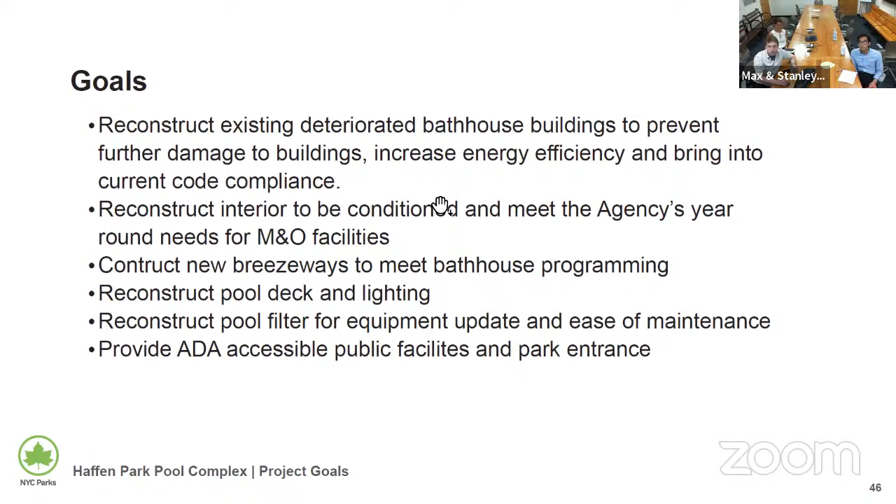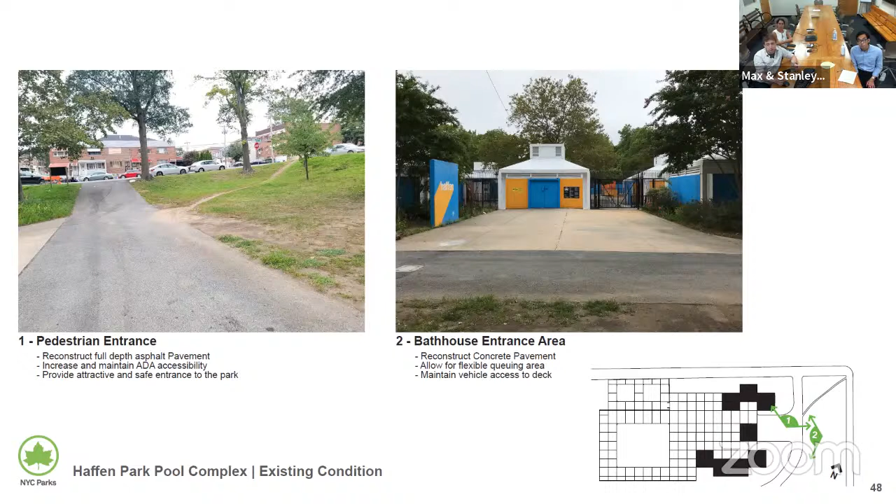On the right, this is the bathhouse entrance area with the pavement built for queuing of the pool area. It's just one big pavement area with concrete, normal slabs. We are going to provide new parking on Burke Avenue because we have that new M&O use in the pool area. They need to park their vehicles, their park operations vehicles, and we want to keep them outside the park.

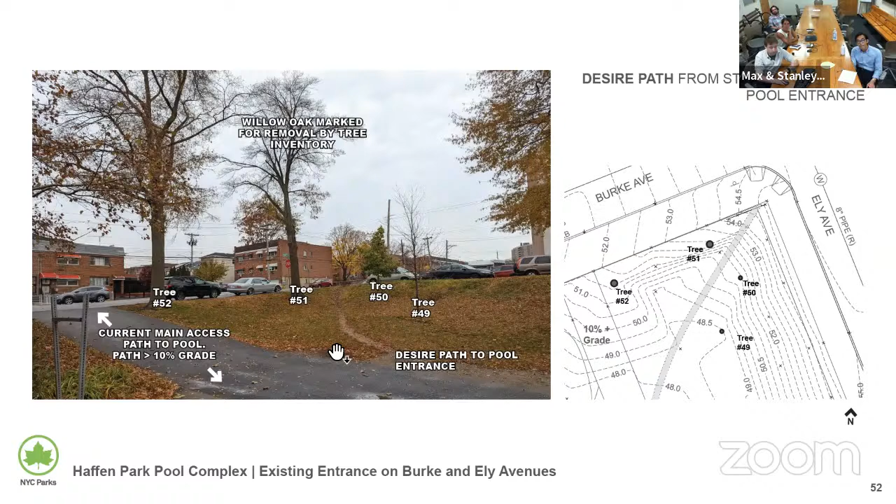Again, at Ely and Burke Avenue, this is the existing entrance. You can see the current main access to the pool has more than 10% grade. You can see the desired path going to Ely and Burke Avenue. In the proposed condition, we have the proposed entrance ramp, which will provide the new entrance experience to pool users going to Ely and Burke Avenue.

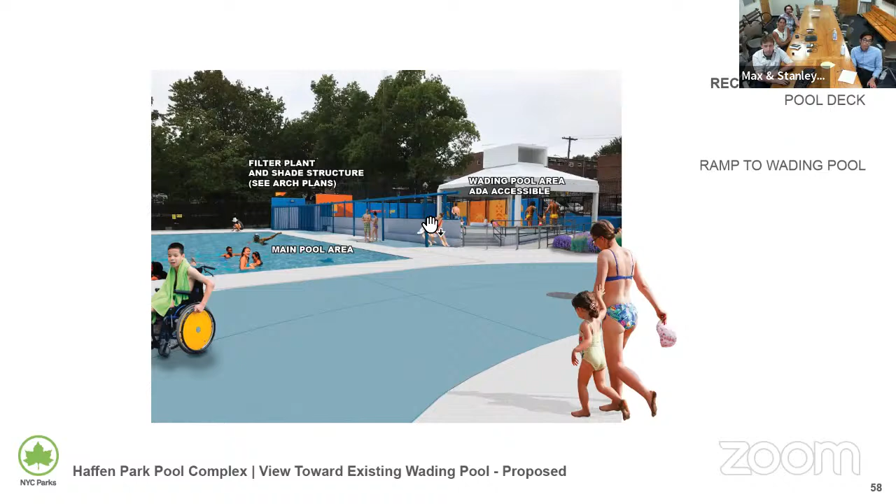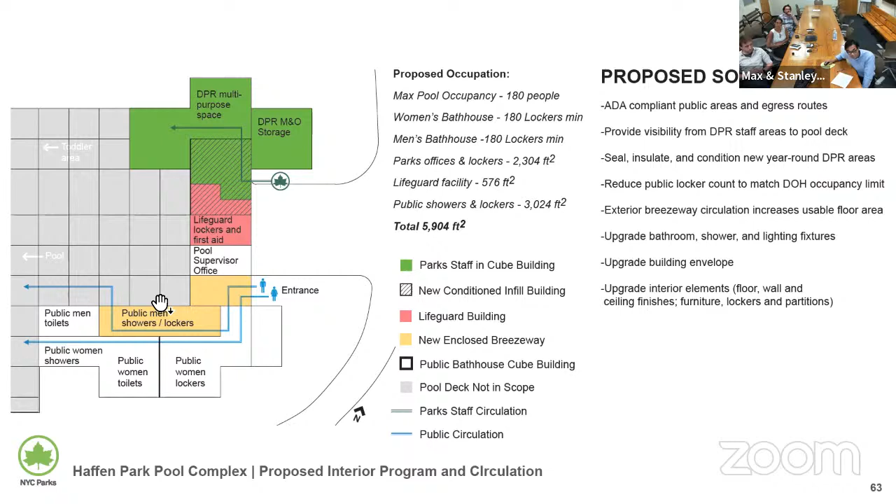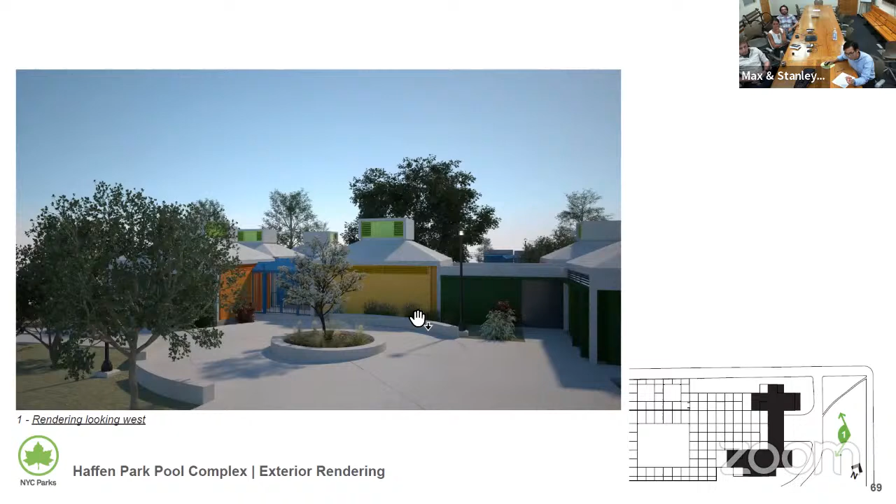A rendering from the inside of the park, again with the dark green facades appearing a bit quieter, but on the interior you see the colors are more fun and vibrant. This view shows the men's locker room breezeway, and the yellow orange building in the foreground houses toilets and showers.

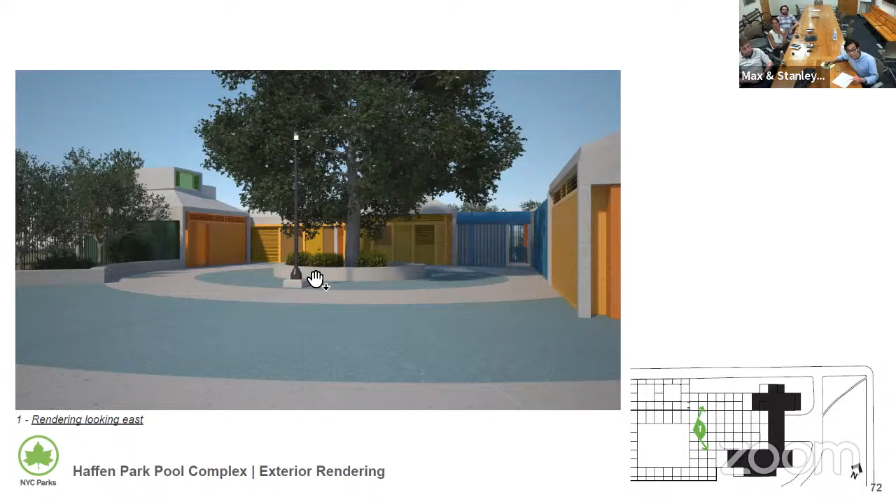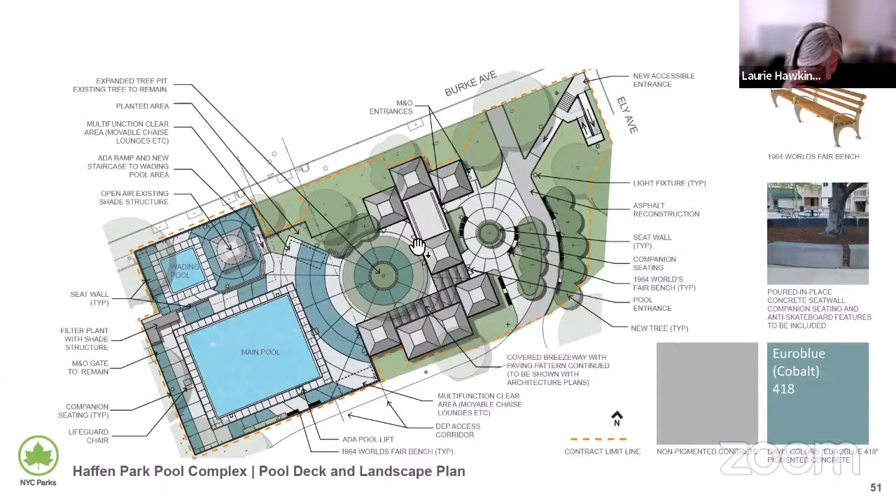canopy, which was said is now ample enough. Maybe we can look at the canopy. This is just a kind of detail, but I spent a lot of time sitting around swimming pools with small children, as I know some people have as well.

And so you rushed through this solar shadow study quite quickly. You have a pattern on it so that you're letting the water go through, I understand, and then it shifts direction, which I kind of didn't understand why. But it feels very kind of mean and tight.

And it just seems like it's so important to be able to get in the shade, because this is the summer and it's so hot at these places and the pavement is exuding heat. And most people are just kind of—all this area that's under shade is always where everybody's clamoring to sit.

So to make a long story short, I just wish we could have a more ample and generous shaded area. I think the tree is fantastic and you're keeping it. So specific questions about the dimension—I know you're stretching it out and trying to emulate some kind of screening structure.

But specifically in terms of the roof where that little hand was, it goes from a short span to a long stretch of these slots. So that's a question. And then just the spacing and everything, when you show the shadow in the rendering—

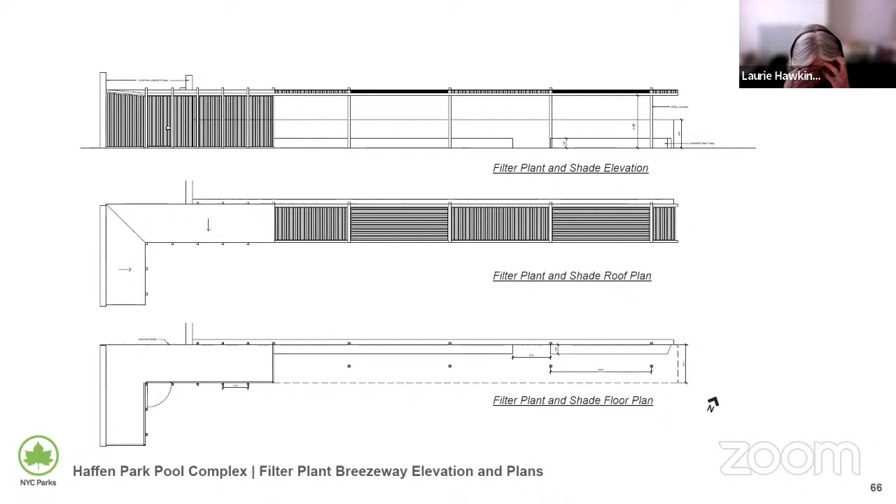when you showed the rendering of this, not the shadow drawings, it doesn't look like a lot of shade. It looks like—I remember standing under a canopy at the Children's Museum in Queens that didn't have enough shade. It was perforated, and I just thought, wow, I'm not getting enough shade.

Sorry for taking so much time, but I just feel like this is a very important component here that we want to address, and you've got a big budget. I know you don't have all the money for the canopy, but it is about quality of people's lives.

Yeah, we'll explore, and Laurie, thank you for the comment. We'll explore enlarging it. I would just say the reason for perforating the surface is because of the heat—we don't want the heat to get trapped underneath the solid surface. So I think that'll actually make the space cooler, but we'll look into optimizing the shape.

Great, I had a question for Nancy. You mentioned very early on that the site had a river or stream under it and that there's some silty soil problems, but you also mentioned the aspiration of putting in some green infrastructure. I just wondered how that is going to work with these underlying soils that potentially have drainage limitations.

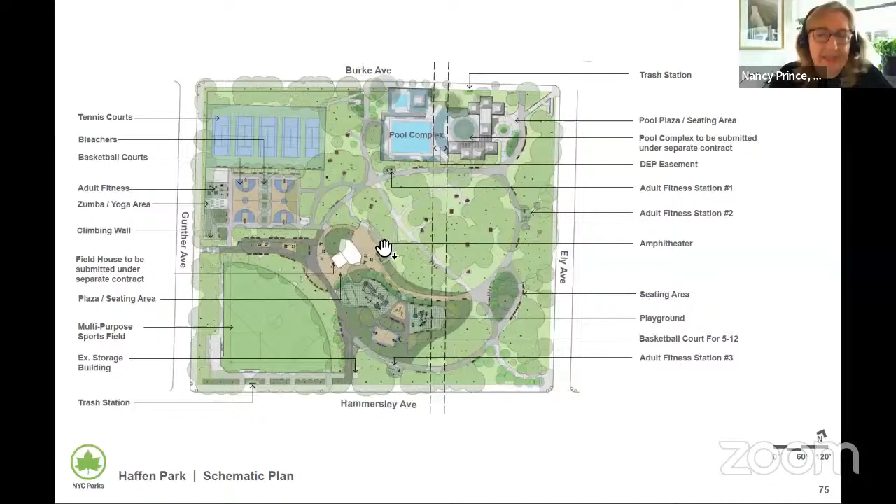So we'll reconstruct the interior of it, reorganize the comfort station to be ADA and make more sense. The diamond shaped area could be available for community activities, and that can be more directly connected to this open plaza and an existing amphitheater that we're reconstructing. There's a design strategy that we'll be seeing on that, with the surrounding grades and circulation worked out in this plan. The reconstruction of this building you will be seeing shortly.

This is the area where you're raising the grade - this is all raised. This is the amphitheater, those steps there, those four seats. And the field house is on the left there.

You can see how we have this going to be a community room, a community space. I don't see much yet - am I going to see more? You are going to see more of this, because I'm very interested in that - the concept of making it threshold accessible, making this space ADA accessible and connected with this outdoor plaza and the existing seating.

You'll see the details of the building. But are you just painting the building? Where's that photo? That is kind of sad - very sad. So that's what I'm wondering, what the design concept is for that area.

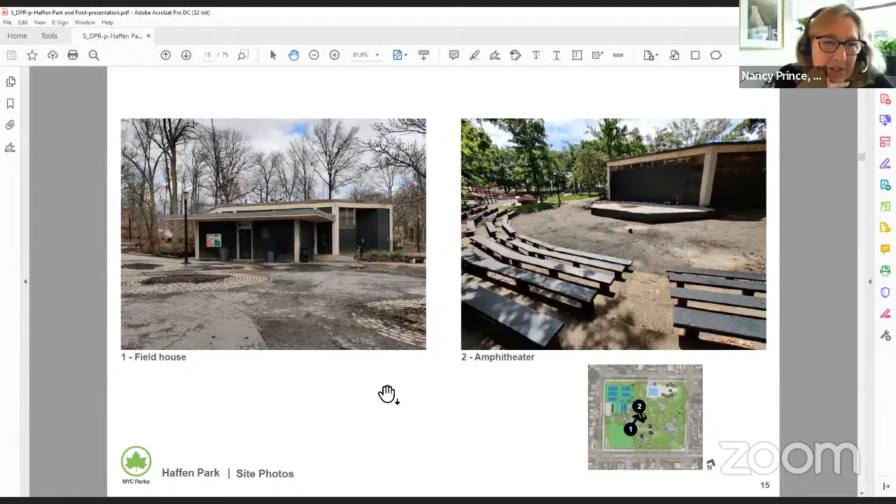So we looked at this - besides just ADA, of course. This building will get a new face, a new finish, reorganized inside. It wasn't in so bad condition that we should just take it completely down. It's worth saving, but it'll be re-envisioned - the way it looks on the outside, the way the doors are oriented, and the way it's organized inside. You will be seeing that in the next couple of months, coordinated with these other contracts.

Thank you. It's not as much of a fun building as the pools. It could be fun. It should all be fun. That's what our money's for, right? The pool is definitely fun. So this will be more, let's spread the fun. Looks very sad right now, so - we're not going to argue with that.

And the park will be done about the same time. That contract may lag a little bit. Okay, any other commissioners?

The funding is in place for this - this is 7% or 10% of the budget. How much of the budget is this one element that's outstanding? I'm not sure, but the funding is definitely in place for it, and it's starting schematic design. I just want to know that it is going to be delivered, as opposed to maybe it'll be delivered. No, it's definitely part of the job - the funding's in place.